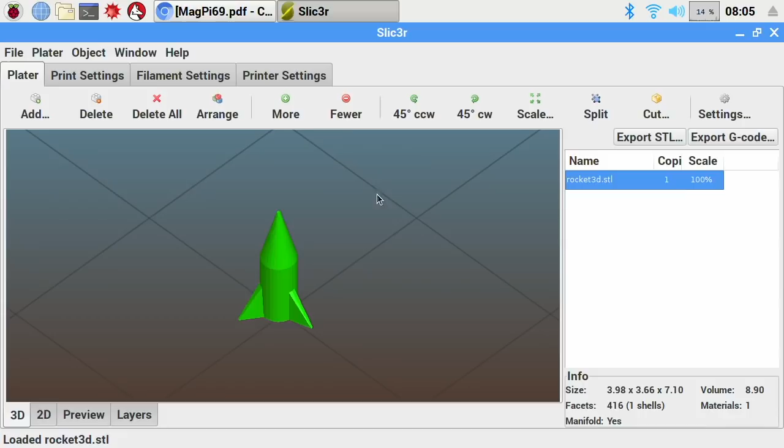Then turn this off. Now we have Rocket 3D here, and we have a nice software, Slic3r. It also works very well after turning on hardware OpenGL. Add and select your model, and it's here. It works very well. When you take a look at the preview, because of the scale of our model, it doesn't look like our rocket, so we need to make it a little larger.

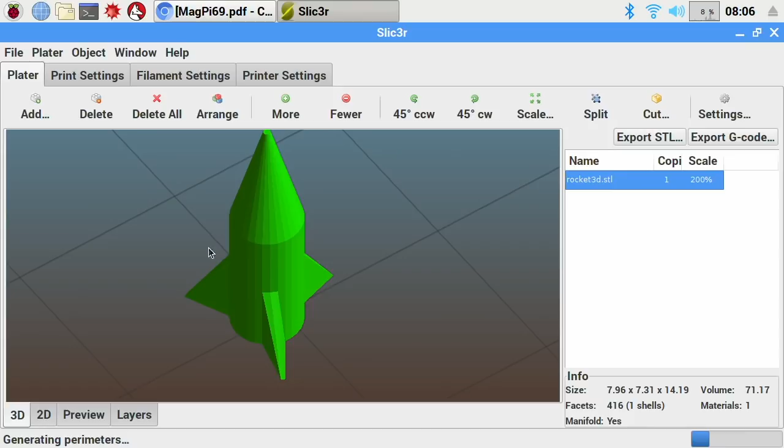Select this and press scale, make it 2 times larger, and wait for the process. Look at this, the lower right corner shows you it's in progress. And okay, it's a very tiny rocket model. You can make it larger. I will show you there's a problem with that, but not a big one.

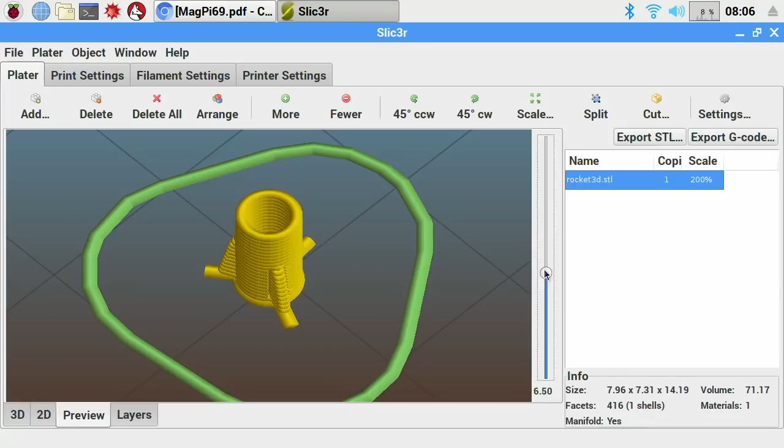And you can check the plastic layers, and then check 2D layers like this, and then export G-code, desktop, and save. It's done. This is the G-code file you are going to send to your 3D printer, and then get your rocket model.

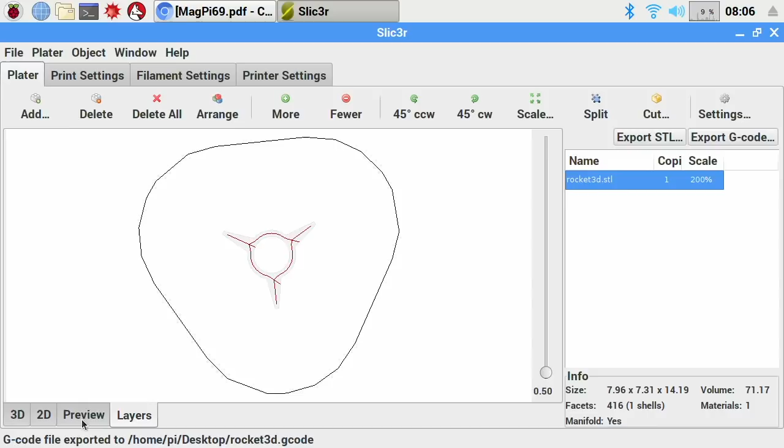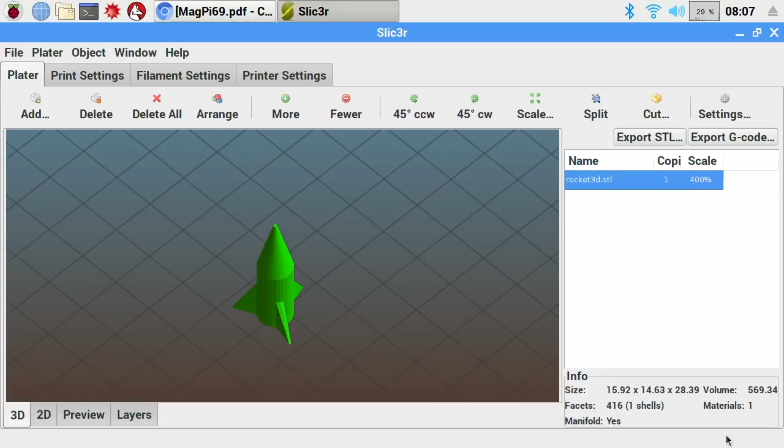Alright, this is all, but I want to show you one problem. If you make your model larger, I will cover this bug. I can call this a bug. This is not a big problem. Okay, let's make it 4 times the original size, 400%, and it's larger, and wait for the progress calculation and look at the preview.

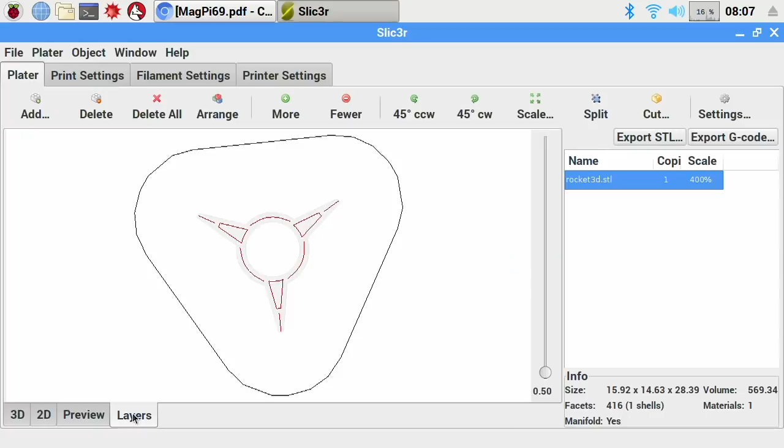Okay, when your model gets larger, it looks like this, because hardware OpenGL is not able to handle many faces, I mean vertices, for the technical name. I guess there is a bug or some limitation there, but there is no problem at all for 3D printing, because the calculations are correct.

If you take a look at the 2D preview, everything is fine. Just send it to printer. This is just a presentation problem, preview problem. Preview is not really correct, this part.

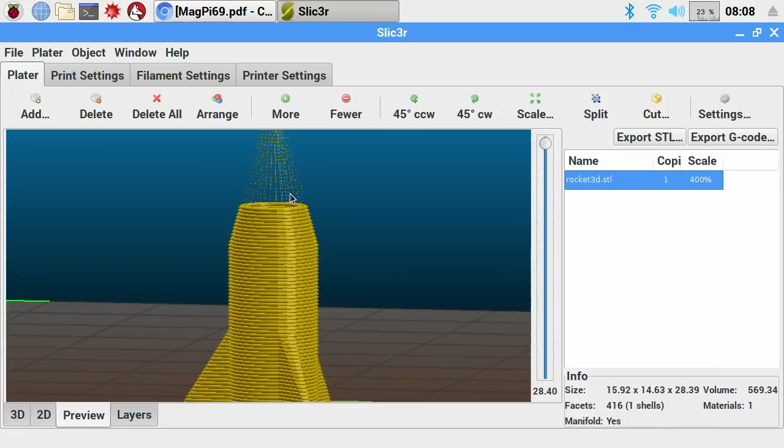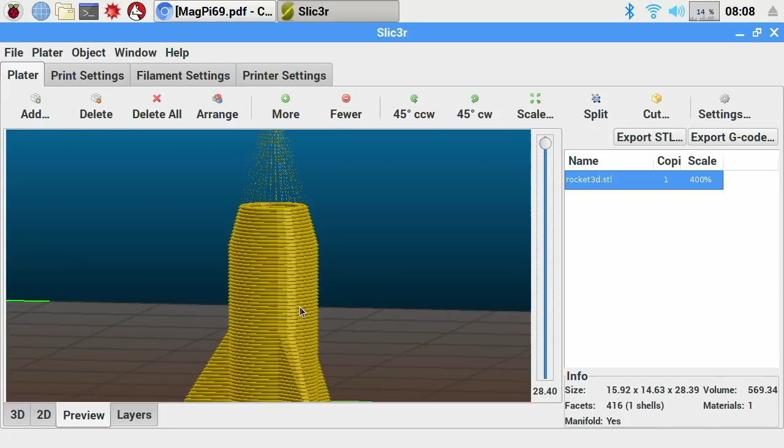If you make it even larger, you are going to see it's like this transparent part starts from somewhere here, and if you make a really large one and try to preview your model, the slicer is going to freeze and your Raspberry Pi is going to freeze. Just don't use preview if you are working with large models.

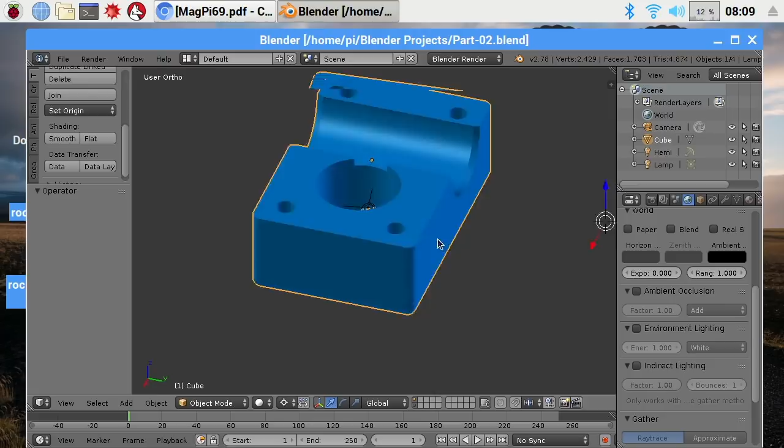Alright, these are the rocket creation using Blender on Pi. I just want to show you some of my projects very quick. Okay, run Blender again. I prepared some demonstration projects. I am planning to make tutorials for those. Okay, let's say you can create a part, 3D part like this. This is going to be my first tutorial. Why do I need this part? Let me show you from the animation I prepared using Raspberry Pi, this part animation.

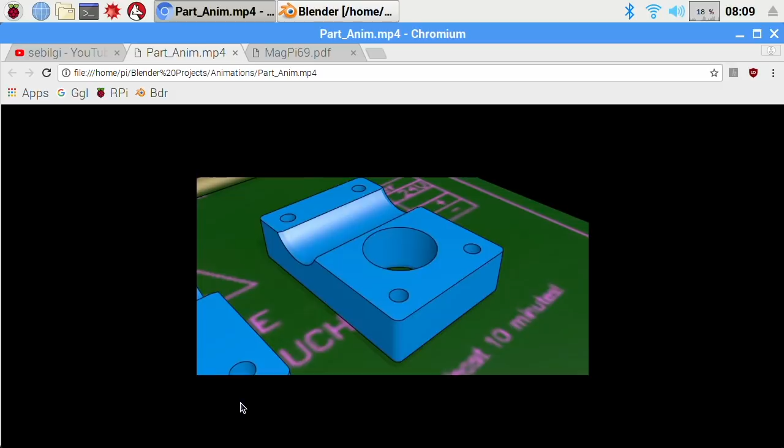I need to fix 2 metallic rods together for a project, maker project. Let's say you also need, and you want to explain your idea to your maker community friends, and you can create animation like this explaining your project. Okay, I'm going to use these parts to fix these 2 rods together, and I'm going to use 4 pins to fix them together. Okay, this is my project and it works like this. So it's much easier to explain your project using an animation like this.